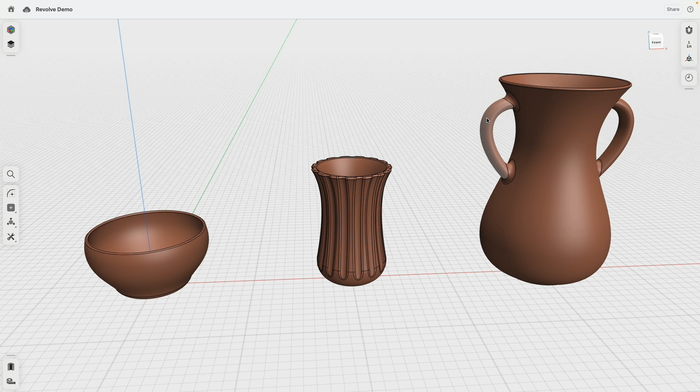In this quick modeling tutorial I'm going to show you how we can create these three vessels in Shapr3D very quickly. The tools we're going to use are Revolve to create the main bodies, Shell to create the cored-out inside, and then Sweep and Boolean to cut or to add swept bodies to create grooves or handles. And then we will go into the visualization tool and add some nice terracotta materials. And with all that said, let's do it.

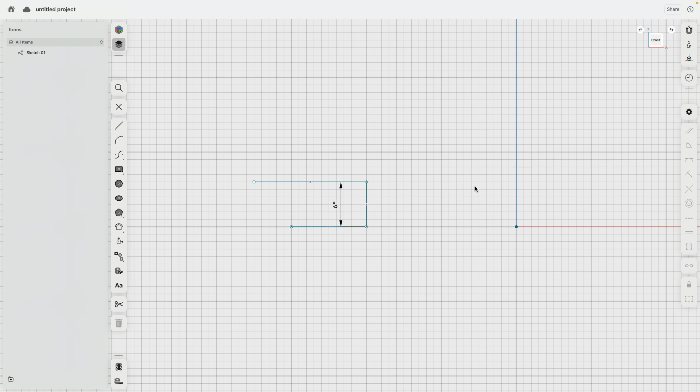In our default scene, we make sure snappings are all turned on. We also are working with inches, so let's go to the front view. We create a new sketch, and somewhere on the ground line, I just draw a line to the right, up, and to the left, and press escape. Then I will click everything. Let's say everything should be horizontal vertical, so they can't rotate. This lower line, we don't know how big this one is going to be, but we know this one should be 6 inches. And then the top one, we can make 5.5 inches. And then, well, we see this one can get smaller.

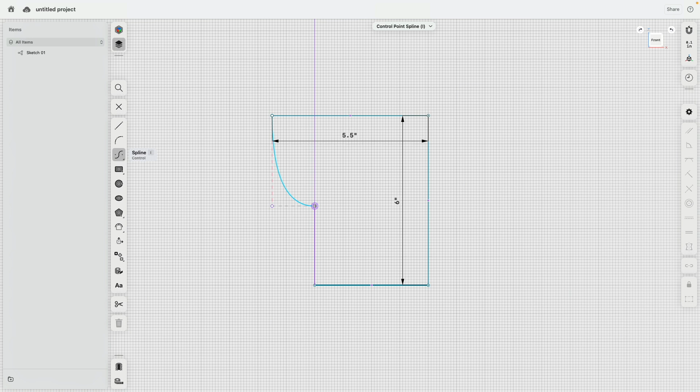Now to create this beautiful curved side, we can use the spline control type. Click down, go to the right side till you see the snapping, click and click down and press escape. Very good. Then in 3D view, we select the sketch profile, shift select the vertical axis and do a revolve. There we are. Pretty cool.

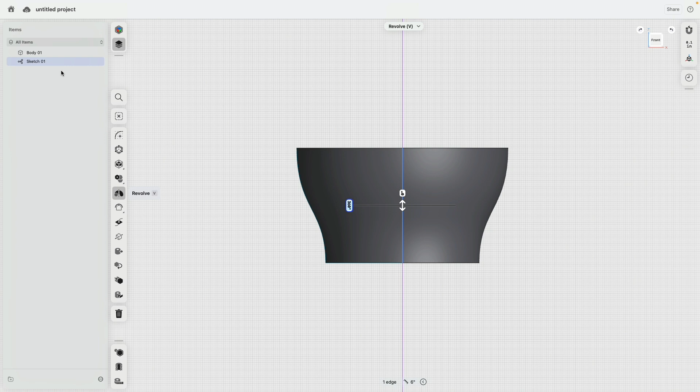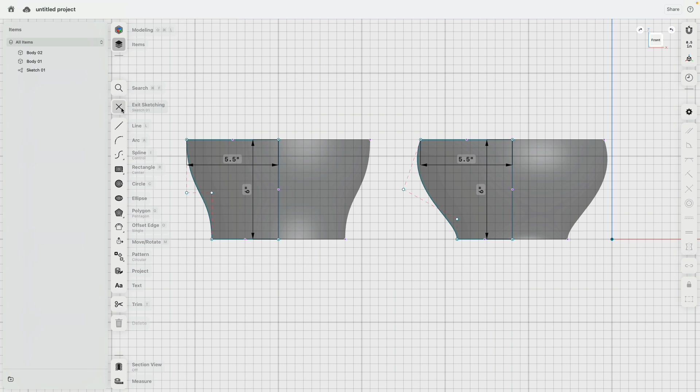Now, let's go back to the sketch body. Everything is selected. Go to move, turn on copy, and we make a copy and move this to the side. There we are. And then we create, same steps, another revolved body. The reason why I'm doing this is now I can go ahead and play, for example, with this sketch here and create a variation of the first one. It's very easy. This way you can compare.

Do you like the left? Do you like the right? The left one is more simple. The right one is a little bit more organic. And actually, I see there's a problem down here. This is too quickly changing. Maybe like this. Okay, this looks nice.

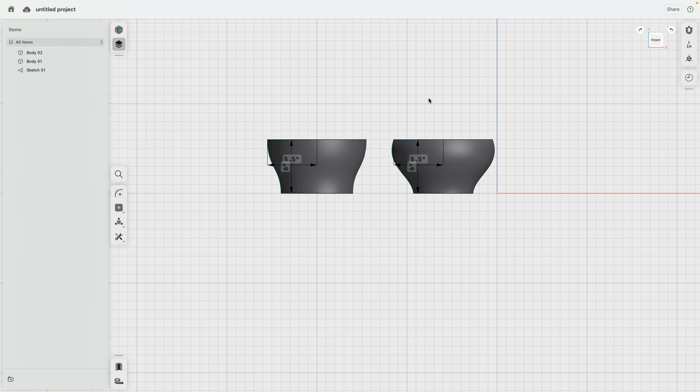Pretty cool. We can select both bottom edges and then we give this a nice fillet, let's say 1/2 inch. And then select the top face and with the shell command, let's say 1/4 inch. Pretty cool. We don't really like sharp edges, so we can select these edges and just break them a little bit, 0.05.

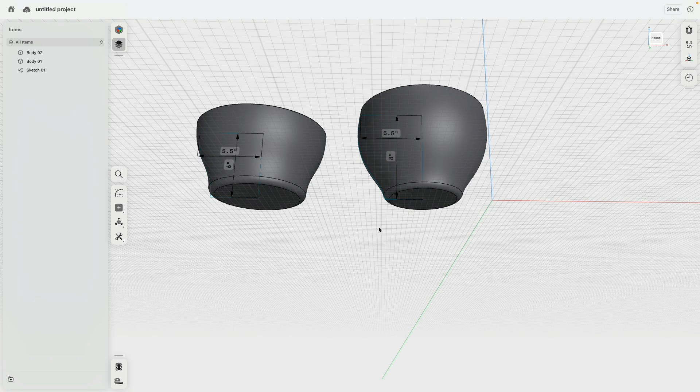Very nice. So as you can see, this is a very easy way how to create a bowl of any kind, fluted, more bell-shaped, etc. We can also adjust the heights. Let's say we make this one 8 and make this one bigger.

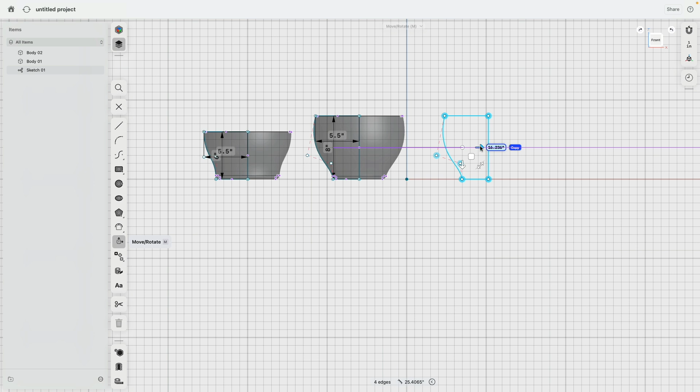Easy peasy. Since we're just creating vases, instead of making a new sketch, I simply go back to the original sketch here. I double click the last sketch I made a copy of, and I make another copy of this one there. Very good. Double click everything and this endpoint. Right here I snap to there. I'm going to delete these dimensions so I can more freely move everything around.

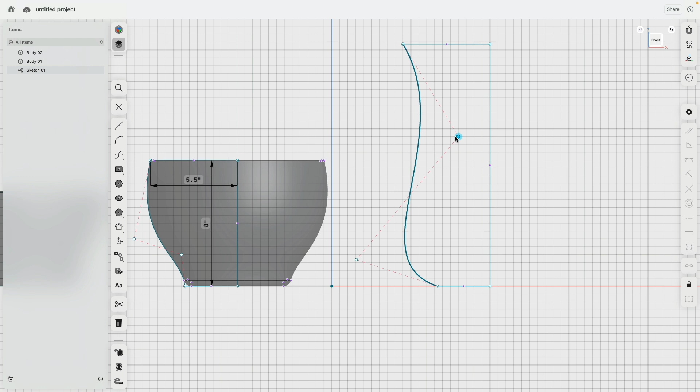This time I might say the bottom will belly out more. And then I create this type of a shape. Okay. Now that's nice. Very good. Then we can select the sketch profile, the axis, and do a revolve. I have all these other shell fillet features now.

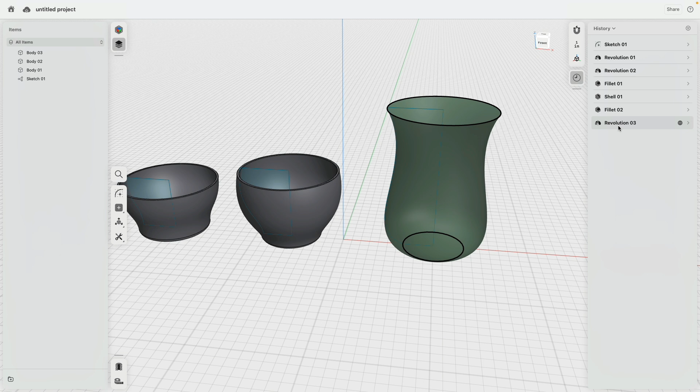So take a look at what I'm going to do in the history. I will move this revolve in front. Then I can add this lower edge to that rounding. And then I will add to the shell also this one. There we are. Pretty cool, huh? Okay.

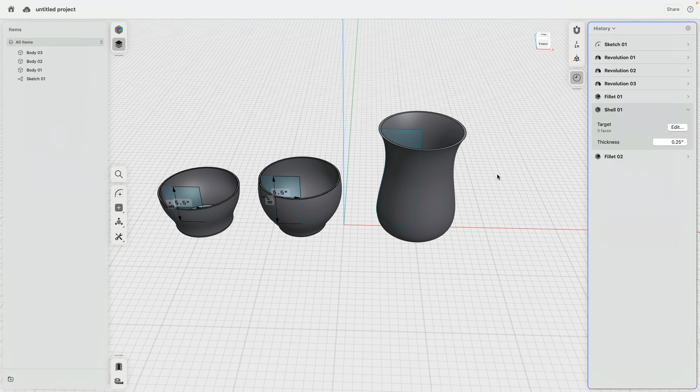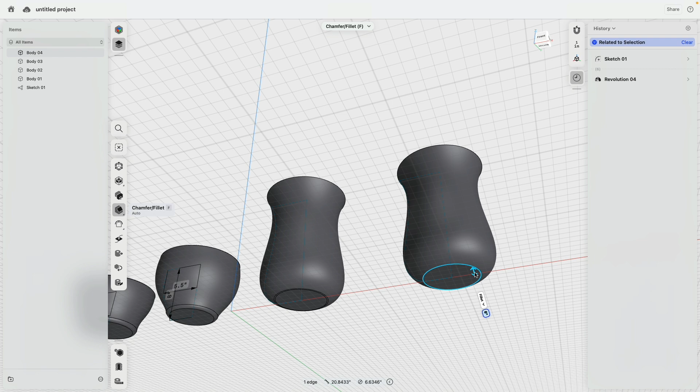I will select the whole thing. Let's make a copy, because now I decide how this would look if I'm creating this pattern detail. Here again, I add the revolve. Very good. I will make this one with a different radius and the shelling node this time. I give it a different thickness. So let's say it's going to be a thick wall, 0.75 of an inch. Okay, beautiful.

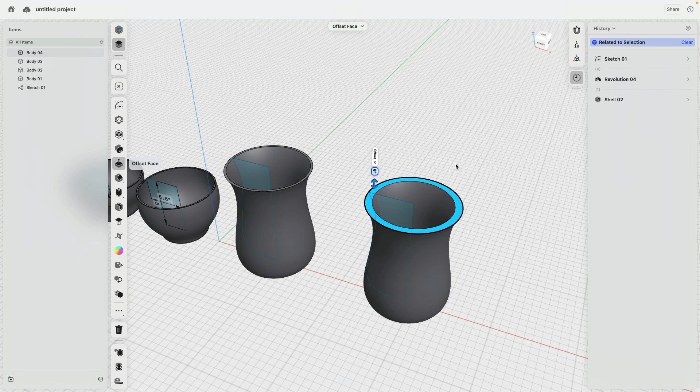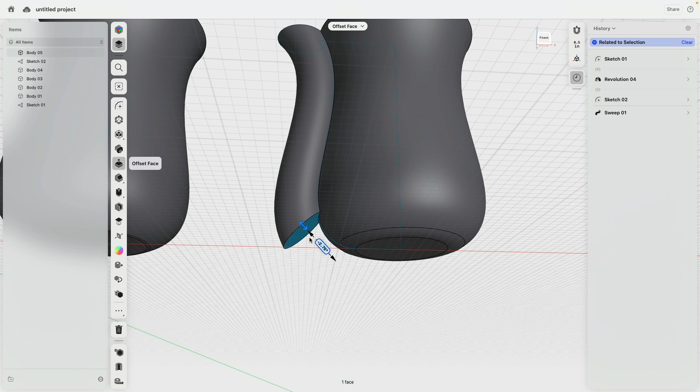Now I will click the top face and then I go to sketch, because what I'm going to do now is create a circle here. Let's say like this. Very good. And then this circle, I could sweep around this. Ah, okay, I see this goes down to there. If I bring this one up, it stops there.

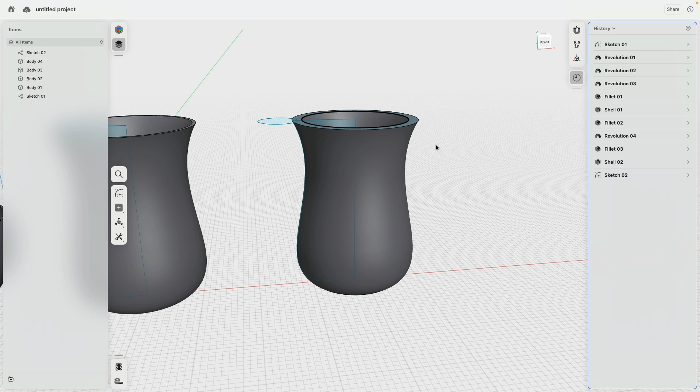I can round this edge. Yeah, that's not super good. The quality is not really ideal. So how can we do this better? The last three features here, I right click and delete. Also that sketch we delete. That sketch needs to be rotated. It needs to be perpendicular to this spline.

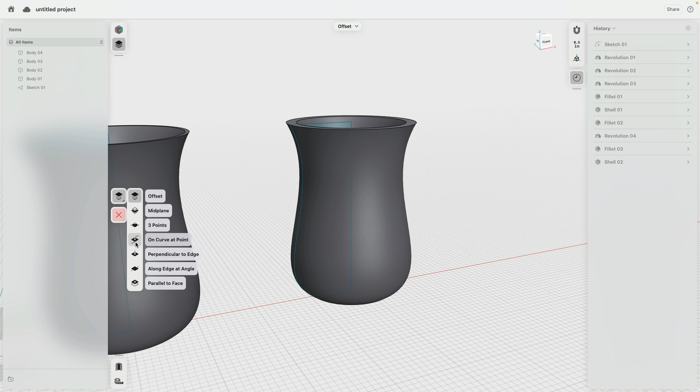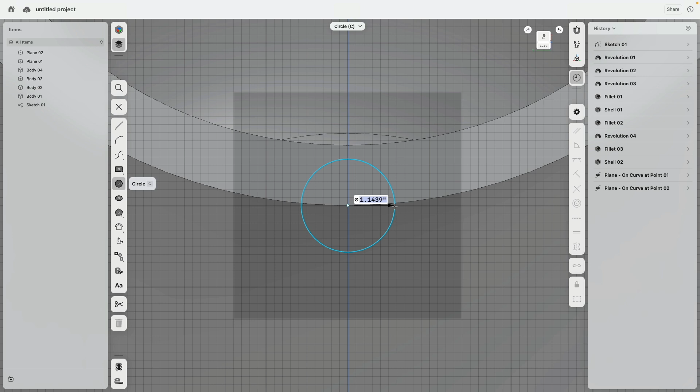So what I will do is add construction plane, and then perpendicular, on curve at a point. So on this curve. And I will add one more. And I bring this one down, let's say there. Cool. So on that construction plane, now I'm creating my circle. Could be 1 inch.

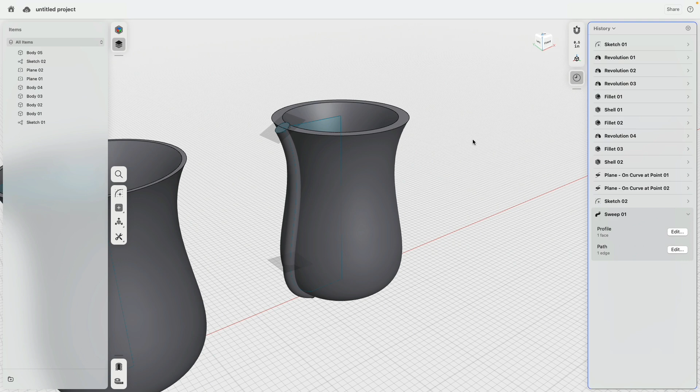And then this, I will run across this spline. You see how this goes much longer. Some programs actually have a tool to say for how long along this spline this body is swept. That's the reason why I created this construction plane. We simply use that to split the part and then we delete it. There. Easy peasy. And now I can round this one nicely.

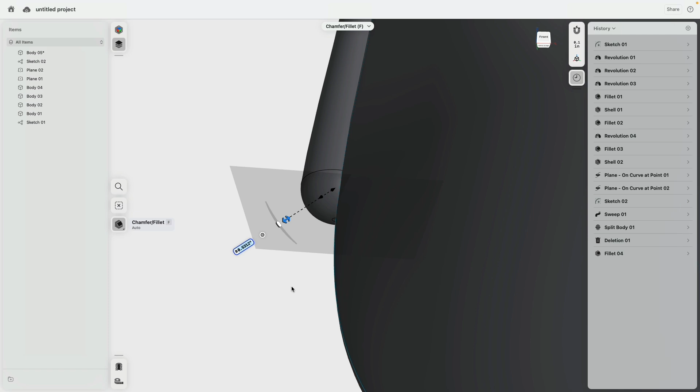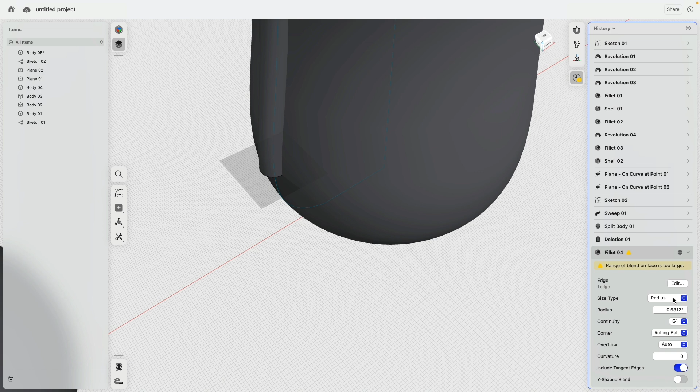What's actually the radius? Hold on. Let's go back to this initial sketch. There we are. Let's say this is 1.2. Actually, let's say 1 inch. Okay, that is fine. So this fillet, which now broke, that's logical. Fillet is too big, 0.5. That's half of the diameter. There we are. And then we could just test something. From this vase, I would like this to be subtracted.

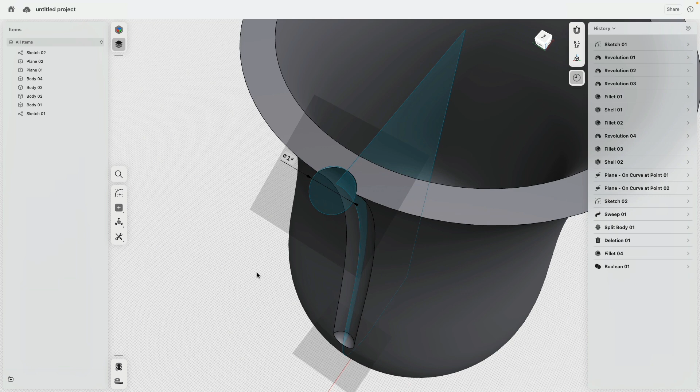Okay, pretty nice. Now you see, to make this work, we needed to shell first, and then from the shelled volume, we cut this away. This can maybe look a little bit tight, but we select this point, we have a coincident constraint, which we can remove. And then look, if I move this away from the center, I create an offset. And there you see, I'm kind of scratching over that surface. That looks actually pretty nice. Let's say that's something we like. Very good.

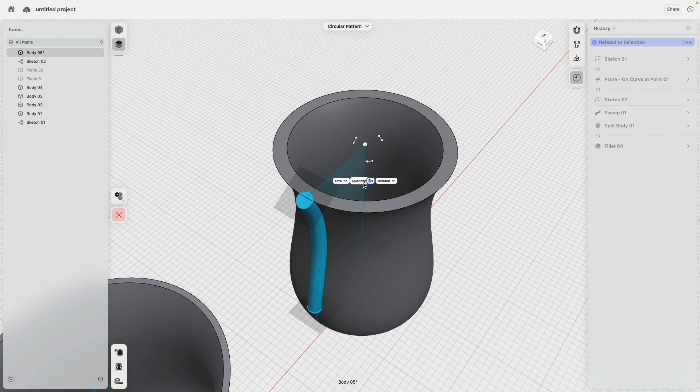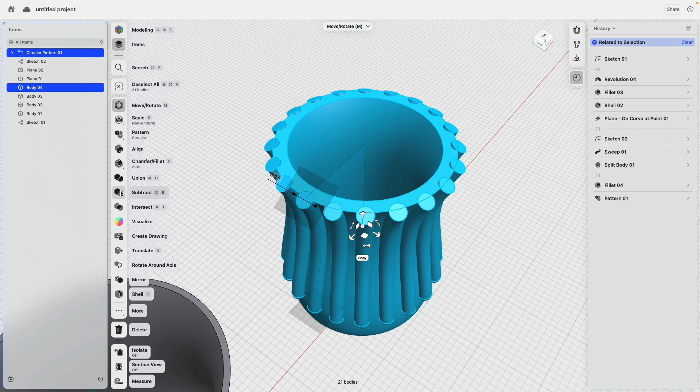Then we solved that problem. Let's delete this last feature, because I don't want to have to do this multiple times. So we're just selecting a circular pattern, let's say 10 cuts, 360 degrees. That's not enough. 20 cuts. That is good. Now, from this body, I would like to select all the circular pattern elements and subtract them. Beautiful. Look at that. This can look very complicated, but if you know how to model it, it's fairly easy.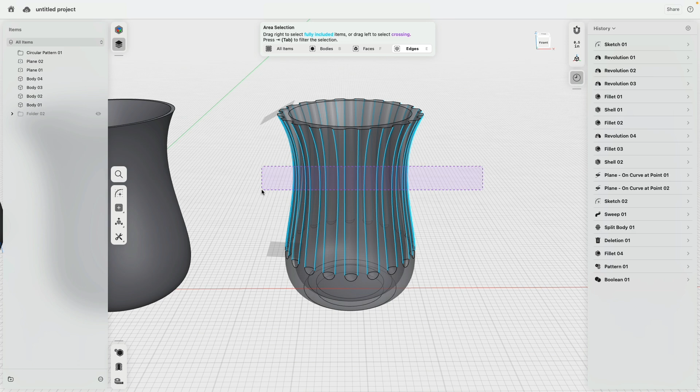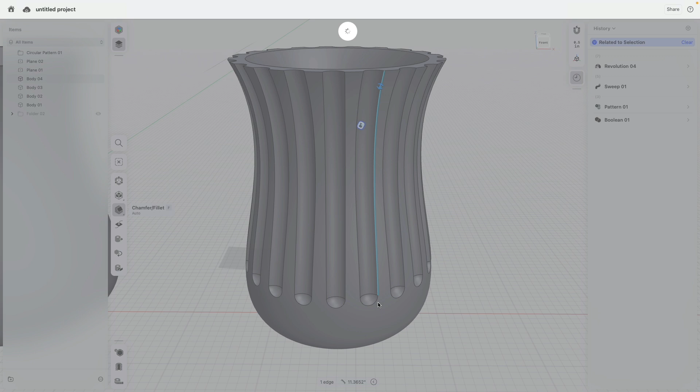To fillet everything, do we go right to left? Yes, we click right to left, select these edges, and let's say 0.1 of an inch. This might take a moment to calculate. Okay, let's see what we can do here. Oh, this doesn't work. I have a feeling that's because of this part here. So basically the software is failing to understand the tangency between this line and here, and to help it, we need to select these lines.

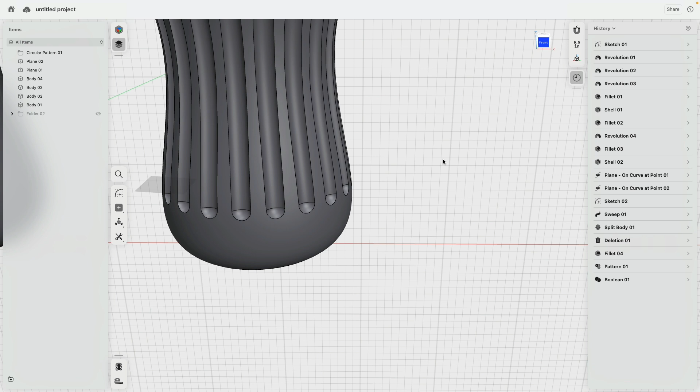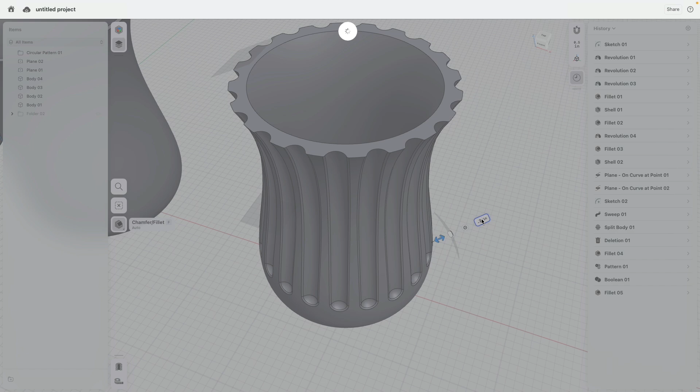Okay, undo, undo, all that is gone. And now I go to side view, tap, tap, tap, select these edges, hold shift, tap, tap, tap, hold these edges. So we do not select these edges, and now that actually should work. And it does. Beautiful. Now we can go 0.2. Very nice. Maybe 0.1, and here 0.1. Look at this. This looks actually really nice.

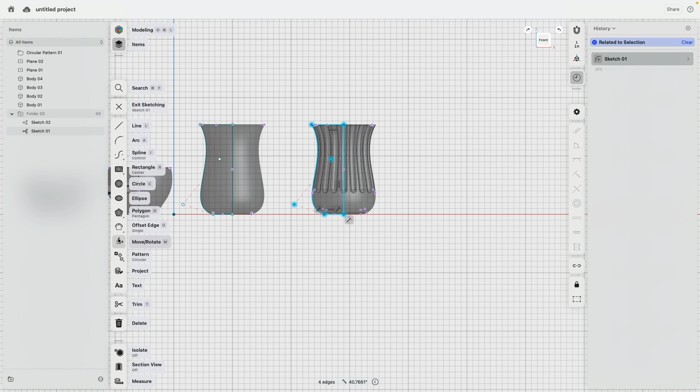Okay, so how do we do the handles? I go back to this first sketch, make a copy, move everything. Oh, no, not move the sketch. That was my mistake. Select the copy and make a copy of this one. There. And this one I move up a little bit. Can play with this more.

I am going to make this sharp. Then I'm going to disconnect this because I would like to add another section of spline in there. Press escape, escape, smooth and smooth. There. See, we can sculpt this a tick more. That looks nicer. Let's do this one more time.

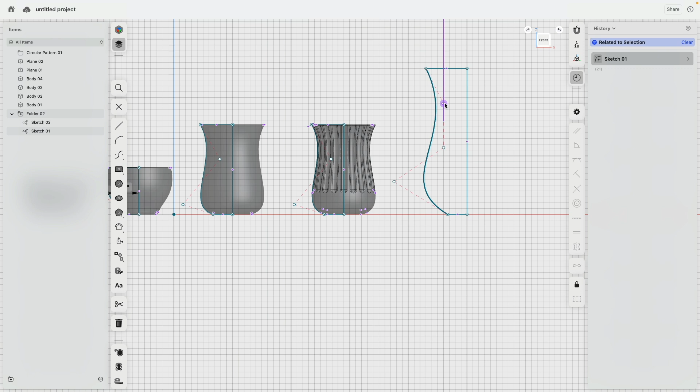And escape, escape, and smooth, and smooth. Very good. That actually starts to look too crazy, so we can select one and delete it, and that fixes that actually. Very good. Maybe this one we bring over a little bit there. Okay, nice. Maybe a little bit wider. We don't want this to tip over. Then we do our revolve.

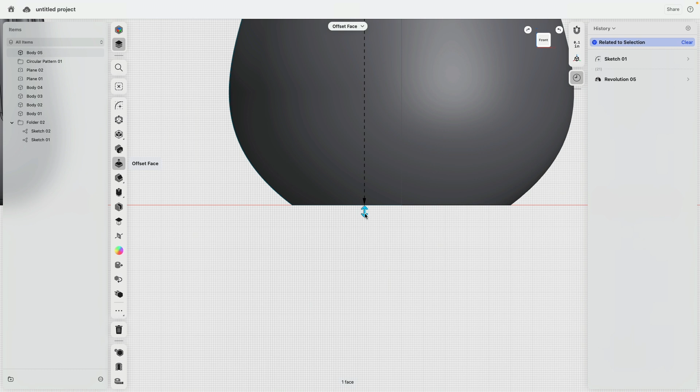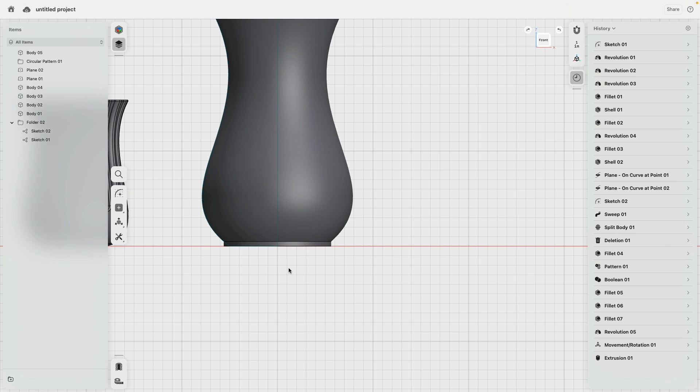I would like to have a small base on the bottom. There are multiple ways how we can do this. We could have sketched this, or I bring this one up. Question is, I need to understand how much I'm moving this face up. So 0.5, okay. And then this I can extrude down 0.5. So this way we have the bottom part.

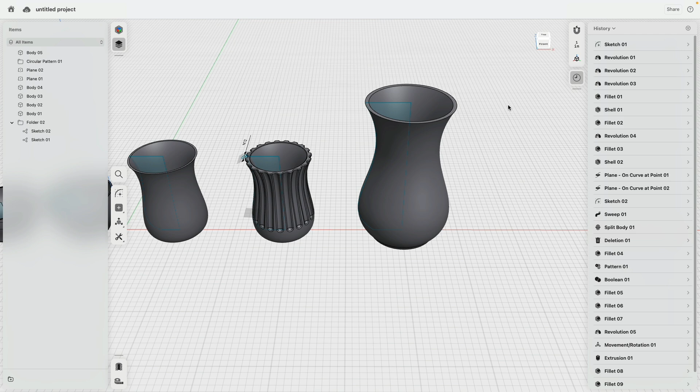This is all joined together, and then we can round these edges. There, easy. Good. Then we can go ahead and shell the top, say 0.5, so it feels a little bit thicker, more stable. And we can do now the handle. We could add this to the original sketch, but this sketch defines the main bodies, and then this sketch 2 creates this detail. So I will go ahead and create a new sketch.

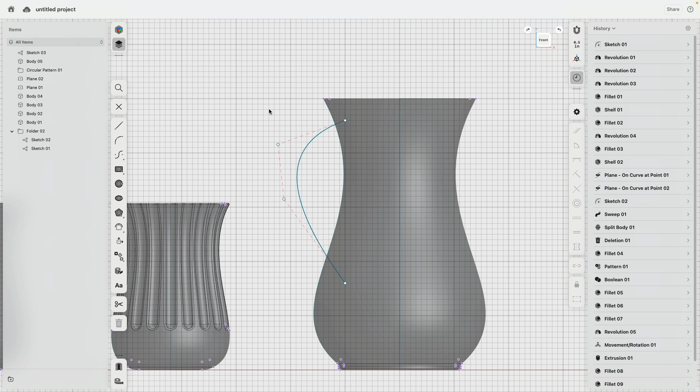So I know that this one is for the handle. Well, let's say like this. Whoops. Sorry, one more time. Click, click, click, click, and press enter. Oh, this one I delete. There we are. This should be nice and perpendicular. Looks a little bit like a Greek vessel. There we are. This now should be a nice handle.

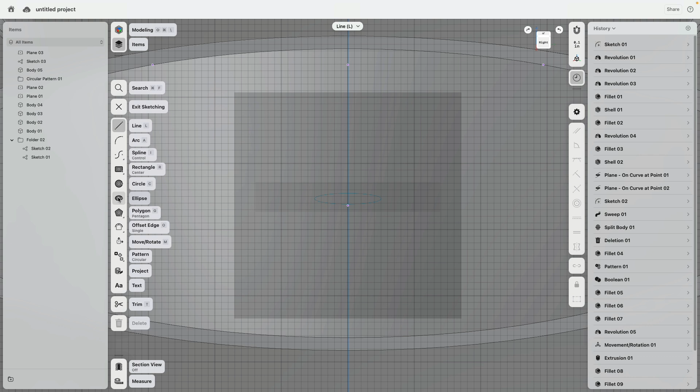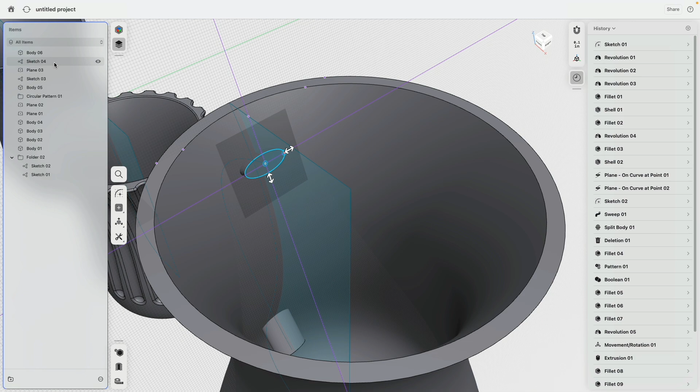We can select this spline, add a plane along this curve. Very good, thank you. And then on this construction plane, we create the sketch. There's our midpoint. This time, let's use an ellipse. There we are. Let's say like this. Then we select the ellipse, select the spline, and go sweep. Okay. We can adjust the proportions as much as we want, so that, for example, it looks nice and stable, less flimsy, etc. That's kind of cool.

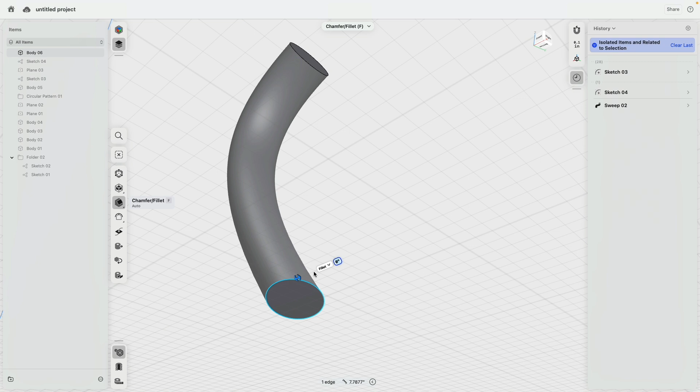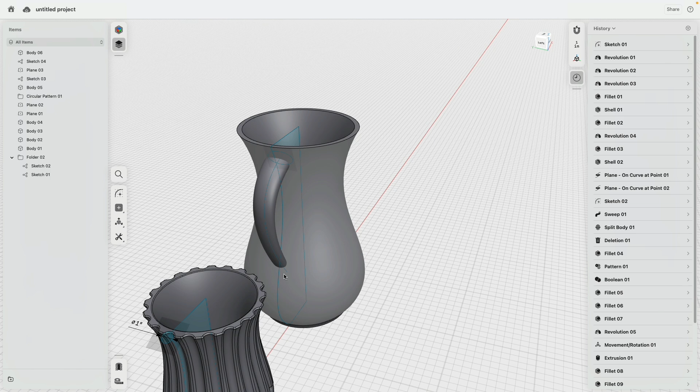I'd like to show you a nice trick. We are going to select the handle, isolate, and then I will select this bottom edge. Then I go to scale, make sure this is uniform, and I'm scaling this. You notice how with this we create a fluted shape, bigger to smaller. So I don't need to create an extra sketch with another ellipse. I simply scale the end part.

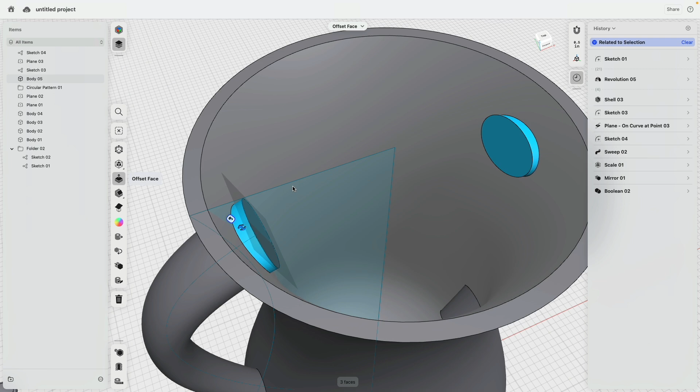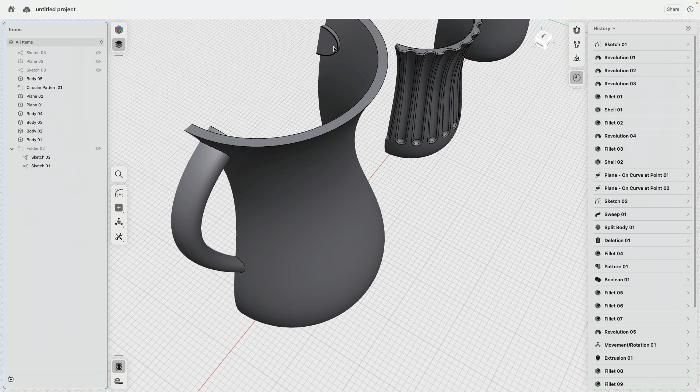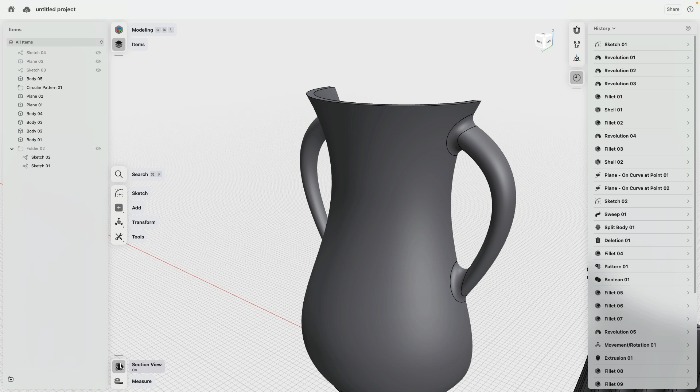Zuck, zuck, zuck. There, there, and there, and delete. And Shapr repairs everything for us. Really amazing. We can select these edges and then we round them nicely. Turn section view off. And there we are. Maybe here and there, 0.1. Pretty cool.

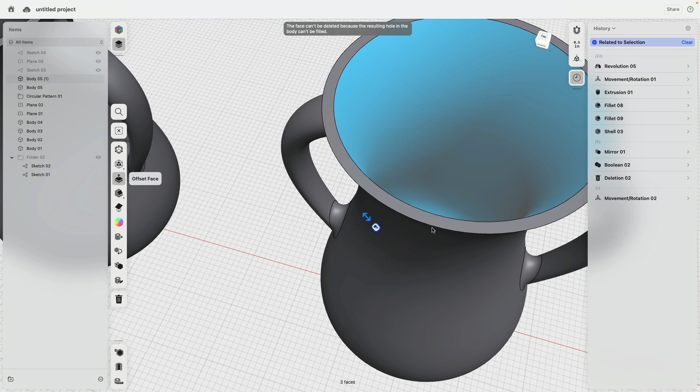So you see, this is actually not really that complicated. Now this is going to be different than the introduction video. Wah, wah. This is what happens sometimes. I now would like to add a spout to this piece on top. So I will undo the last filleting step. Then I will select this and make myself a copy, bring this over to there. And I'm curious, can I select all this and delete? No, I cannot. Okay, that is fine.

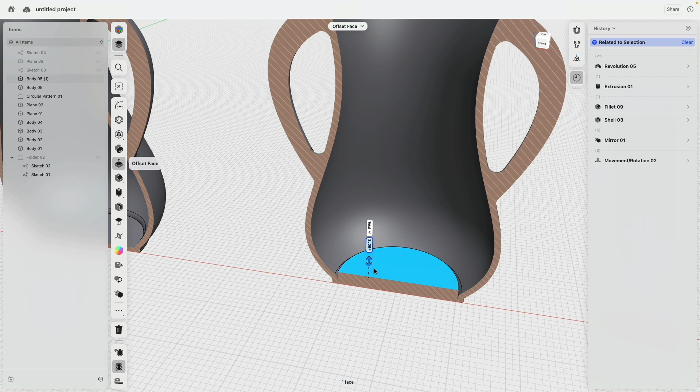How do we do this ideally now? What I want to do is select this and this and this. I really cannot delete this. Okay, can I delete this one? No. Can I move this one up? Ah, okay, good. So this is like an extra step. I'm going to delete this last step here because I realized what I wanted to do is not so easy, but this is where the history comes in very useful.

And again, I leave this in this tutorial because this was an impromptu change of my script. And this is a great example to show you how I think something could work, but then it doesn't work. And then I need to figure out, well, how can I make this work?

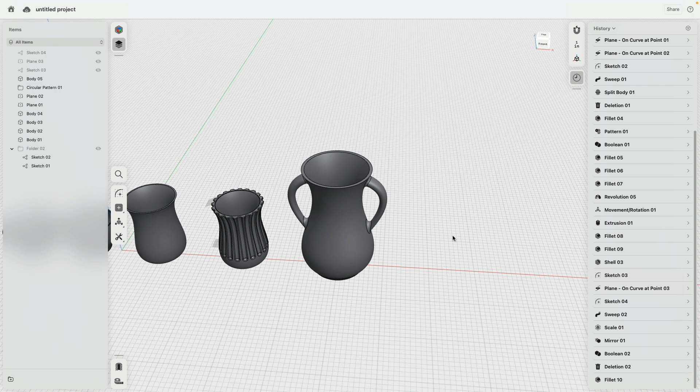Honestly, all I need to remove is this shelling command, I think. So here, this one I suppress. Oh, then we get some other stuff here. Let's delete this. There we are. Okay, so if I select this and then I do a shelling, 0.5, does that work? 0.2, does that work?

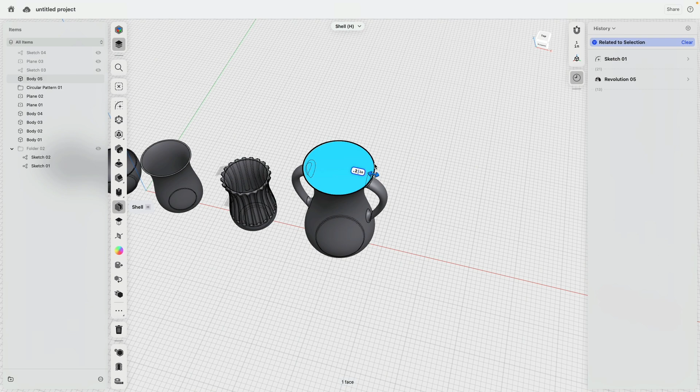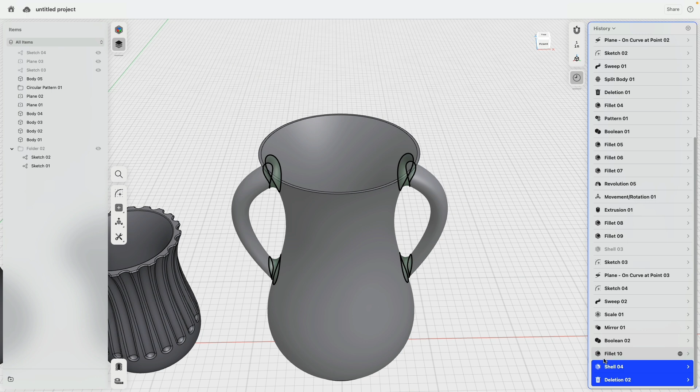It works, but then you see, logically, we're also getting these parts shelled. Ah, but I can delete this. So this is actually good to know. Because what I will do now is all this we delete. Okay, I select all this. That's my copy. And I make a copy, bring this one over.

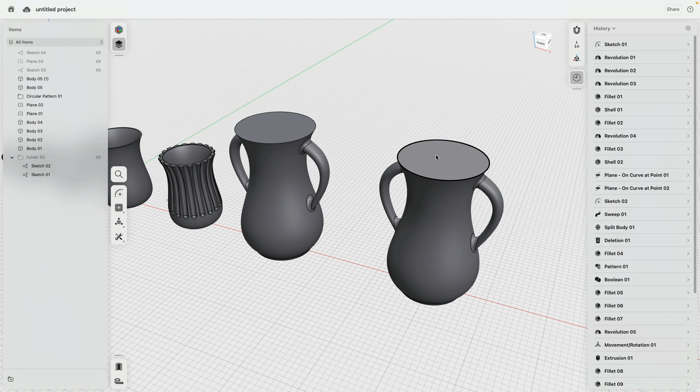What I'm essentially showing you here is digital prototyping, problem solving. We build something, we have to sometimes fight with the software. We want to build what we want and not build something the software thinks it can allow us. So sometimes there has to be a little bit of experimentation, and this is fine. Good.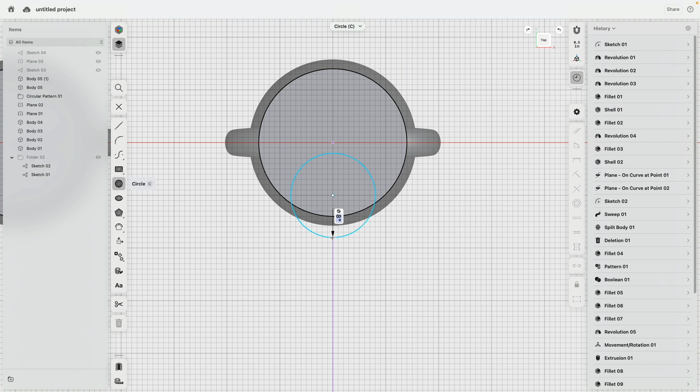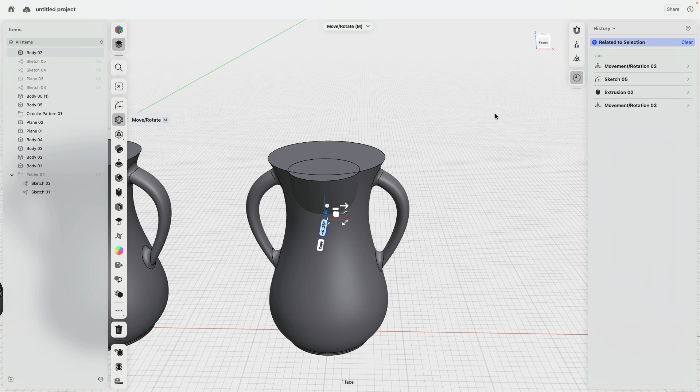So we can do this with a very simple circle. Let's say like this. Very good. Then I select both profiles, extrude this one down, I don't know really how much, new body. And then I select this lower face, go to move and bring this one in. Okay. Now do we like this? It's maybe a little bit too big.

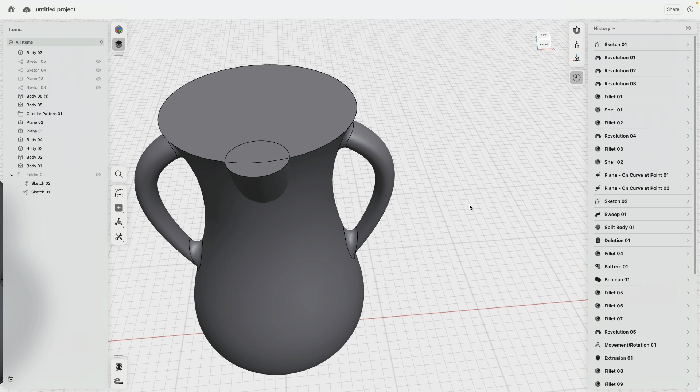So if I change this maybe to 4, bring this over. Yeah, proportionally that, for example, feels actually better. The other one was too big. Okay, so these two now I can union. We have this edge here, which now we can fillet there.

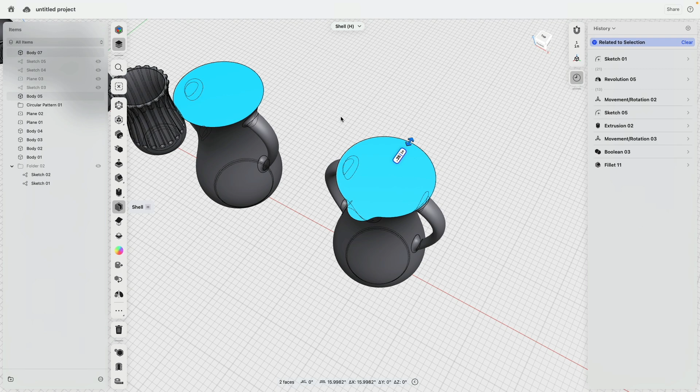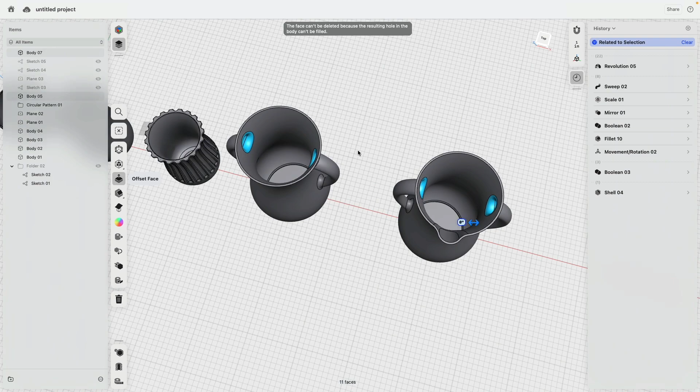Then these two shells or surfaces we can select and then we can shell everything. 0.25, very good. We know that we can actually select these faces and then delete them. There we are. Yeah, I did not have everything selected. And I think we might even be able to adjust this a little bit.

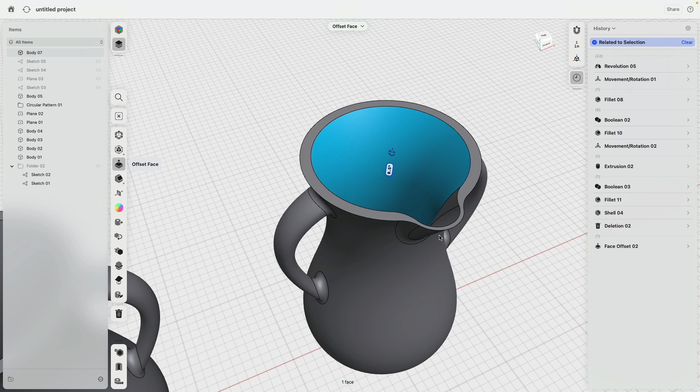Yeah, you see, even afterwards, we can expand this, make this a tick thicker, for example. Which is kind of cool how you see, this is thick, and then there it gets thinner. I leave that actually on purpose. That's really quite interesting. That was not intended, but happy accident. The base is actually way too, how could I say that, thin, can easily break. You see how we are adjusting everything here.

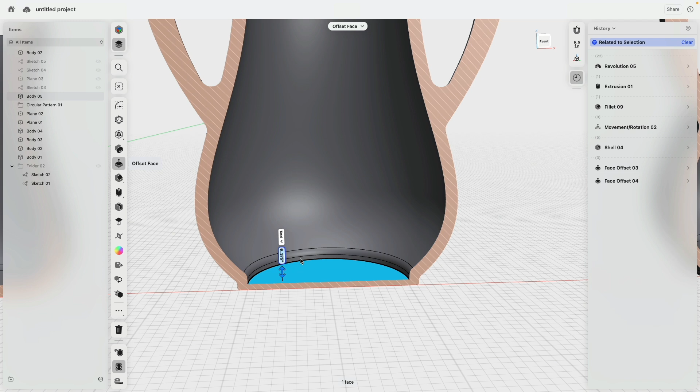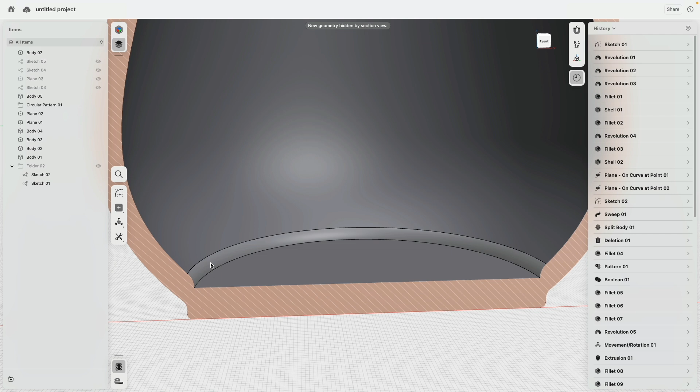What if I delete this? I think previously we weren't able to delete. Oh, we can delete this. Can we then delete this? But can we bring this one up? Yeah. Can we delete this? There. This is like 3D Sudoku sometimes, honestly. How do I do this there? Bonk. Very good. That's how you figure stuff out.

And actually, that's how I learned everything, to the frustration of my wife.

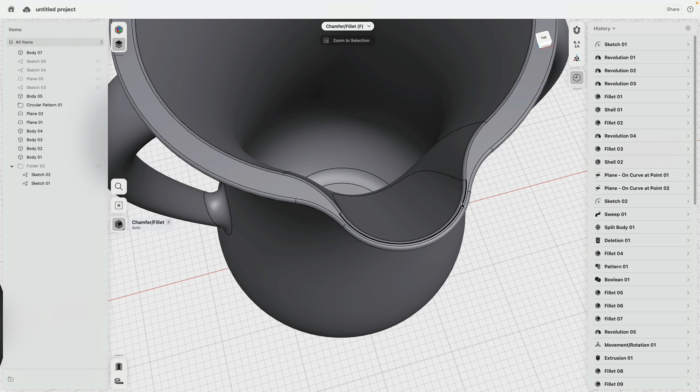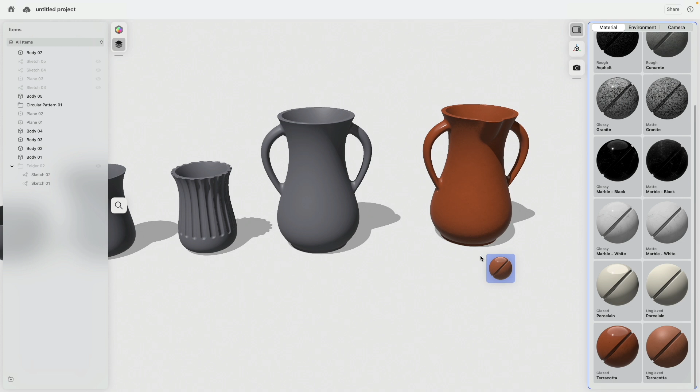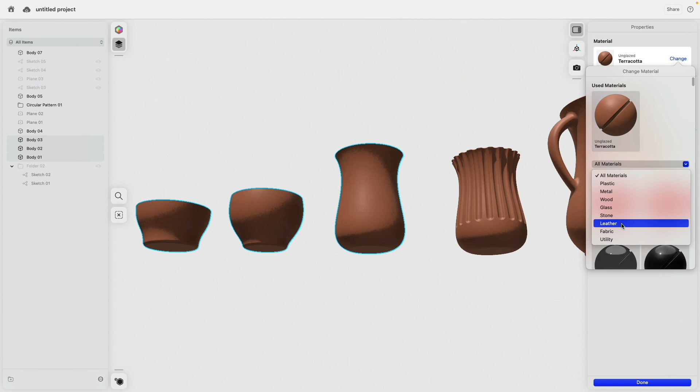There and there and there. And if you want, let's say you actually spend some time on the exterior and we put another kind of glaze over it there. Oh, there you see the outside is glazed terracotta and the inside is actually the unglazed terracotta. Can also use some other materials, put this in.

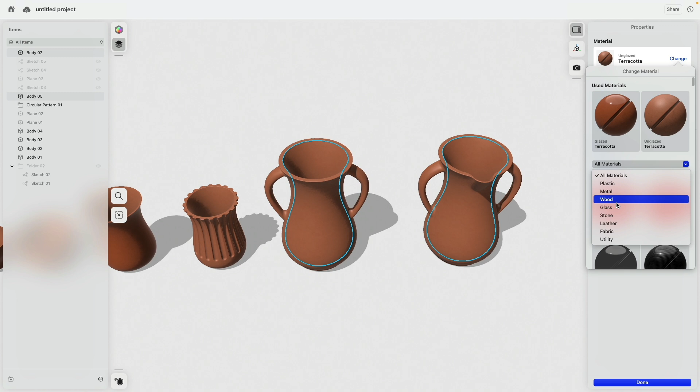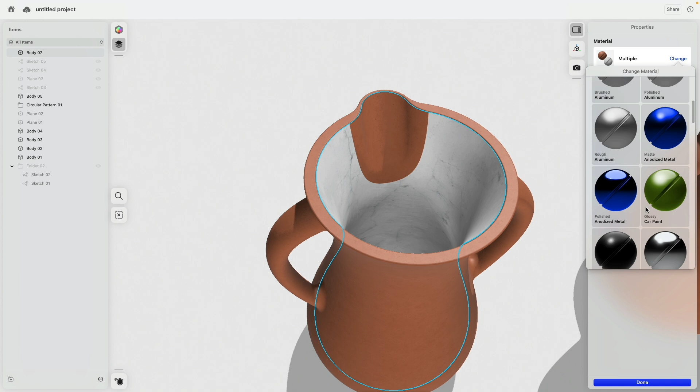How would this actually look if maybe we go to stone. What if we make this granite? Looks kind of funny actually, or porcelain, marble. I can just do a lot of really fun designs that way. Or here, let's go a little bit beyond. We are going to just gold plate the inside. There we are. And the same here. Anyway, I'm having too much fun with this stuff.

So you see how through simply playing, you can come up with very interesting ideas or interpretations. And with all this, we are done. Good job.